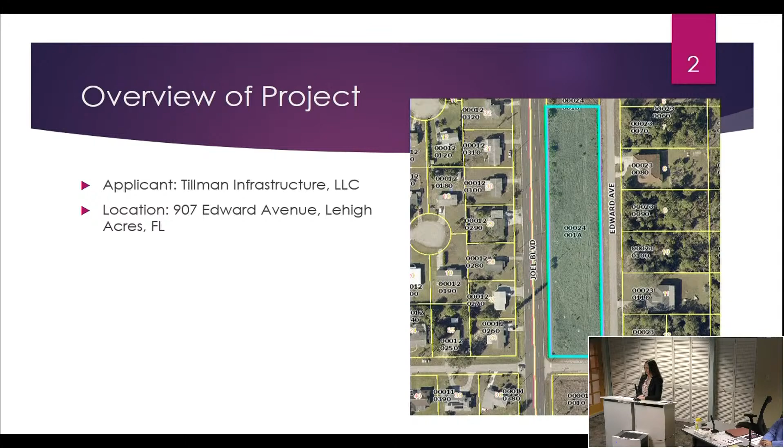We're here today for case numbers SEZ2022-00003 and VAR2022-00006 to request a special exception and variances to construct a 155-foot wireless communication facility. The property is located at 907 Edward Avenue in Lehigh Acres. The property is a narrow strip of land between Joel Boulevard and Edward Avenue, lying north of 9th Street. The actual parcel is a 75-foot by 75-foot leased area on the southernmost portion of the parent parcel, which you'll see right here in the center of the two streets. The property has a current zoning of C2, commercial, with a central urban future land use category and is presently vacant.

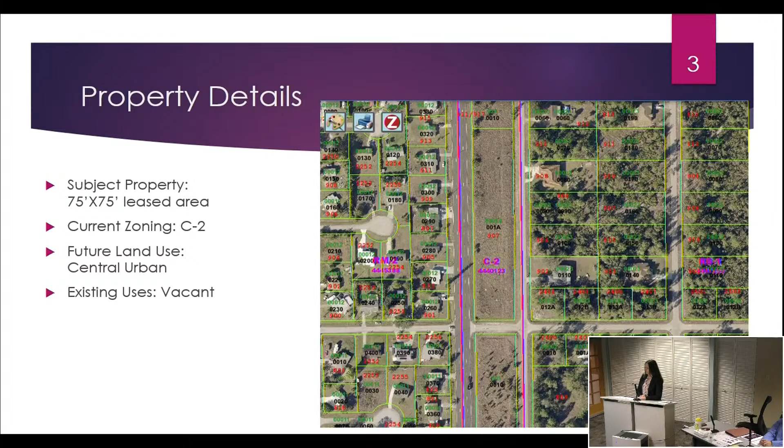The surrounding land uses are generally similar. All surrounding properties are located within the central urban future land use category, and the properties to the north and south are both zoned C2 and are either vacant or vacant with a paved right-of-way. The property to the east is zoned RS1 and has a paved right-of-way in between some vacant and residential property, and the property to the west is zoned RM2, similar situation, paved right-of-way and then residential uses.

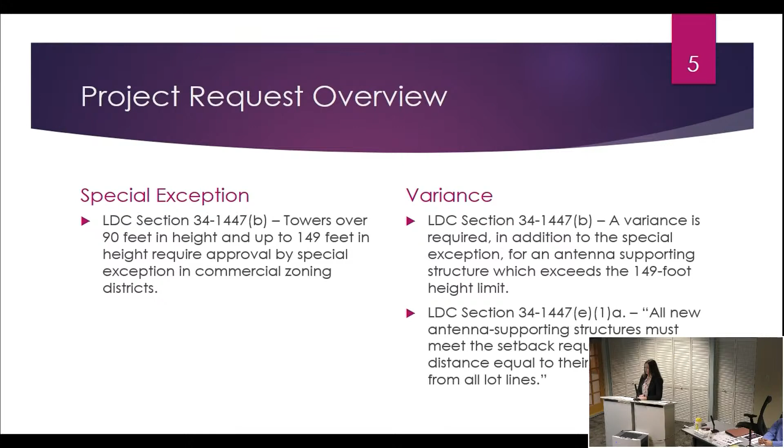So our request is twofold. The first request is for a special exception, required by LDC section 34-1447B, providing that a special exception is required for towers over 90 feet in height for commercially zoned areas. The second request is for several variances. The first variance is pursuant to LDC section 34-1447B, which provides that a variance is required in addition to a special exception for towers exceeding 149 feet. The second variance consists of a series of setback variances pursuant to LDC section 34-1447E1, which states that setbacks must be equal to the overall height of the tower, 155 feet in this case.

So just an overview of the specific request. The special exception is a request to allow the construction of the 155-foot tower pursuant to that prior code requirement. The variances are: number one, the height requirement, an additional 6 feet over what the code requires for a special exception. The eastern setback is a variance of 96 feet to allow for a 59-foot setback. The western setback is a variance of 96 feet to allow for a 59-foot setback as well.

Okay, going too fast again? Sorry about that. The eastern setback is a variance of 96 feet to allow for a 59-foot setback. The western setback is a variance of 96 feet to allow for a 59-foot setback as well. And the southern setback is a variance of 92 feet to allow for a 63-foot setback.

So we'll start with the special exception criteria found in LDC 34-145C3. Pursuant to this criteria, the applicant must prove, first, that the development is consistent with the goals, objectives, policies, and intent of the Lee Plan. Applicant believes this to be the case and will provide further analysis at the end of the presentation with regard to comprehensive plan consistency.

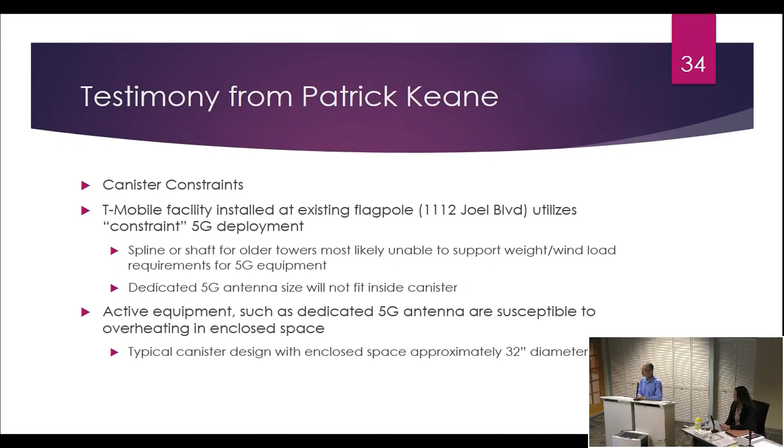So these are some of the concerns. Now, as a radio frequency engineer, I don't do structural analysis or sizing. I'm just making proposals, but I do look at results for structural analysis.

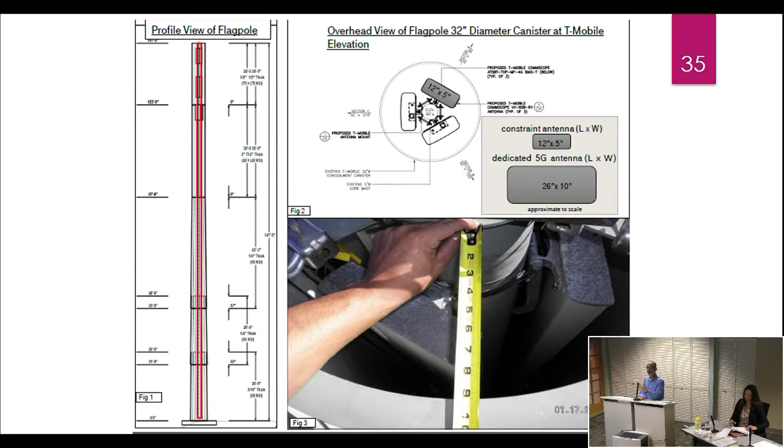So they're ruggedized, larger, heavier, but they provide a higher performance characteristic. When I say radio, there's antennas and there's the radio. The radio is just a box that sends and receives signals. If you have a Wi-Fi router in your house, that's a transceiver, it's the same thing, just bigger and more powerful on a tower. So that's the concerns from why we can't put that on, coming from my experience as a radio frequency engineer.

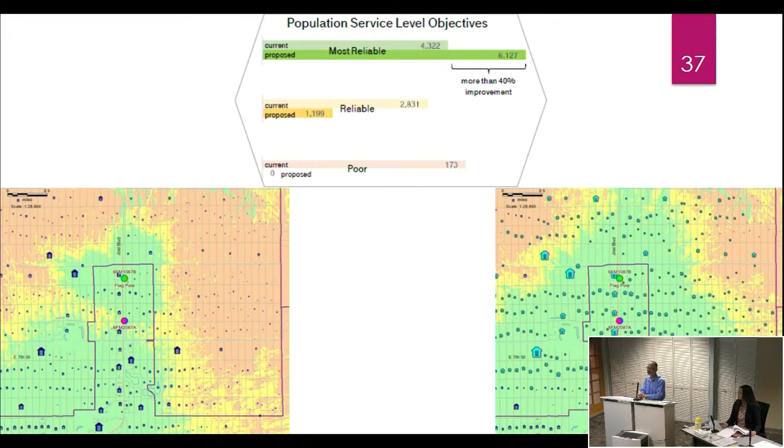Another thing we look at is 911 calls, emergency services. This area is typical, not a downtown, not out in the middle of nowhere, it's residential. Recently, over the course of 45 days, there were 140 911 calls that our network captured. If our customer can't make a phone call on the T-Mobile network, it's going to find Verizon, AT&T, or any other service provider. But in that 45 days we had 140 911 calls, and most of those were outside what's referred to as the most reliable area, not in the green area but in the yellow or orange. So we looked at those locations and said, if we put this new tower here, we're going to improve 40% of those locations as well.

The reason I'd like to put that up is because imagine a person on a call for 20 minutes in a 911 emergency. You don't want your phone to drop, right? So it's very important for us to maintain that continuity. The probability of maintaining that continuity is enhanced significantly by having the full suite of 5G services, because if one service level is inactive or can't be reached, other service levels can be added into the channel, so to speak, to support those emergency calls. Everybody knows how important cell phones are today, so we just want everything to work better, basically.

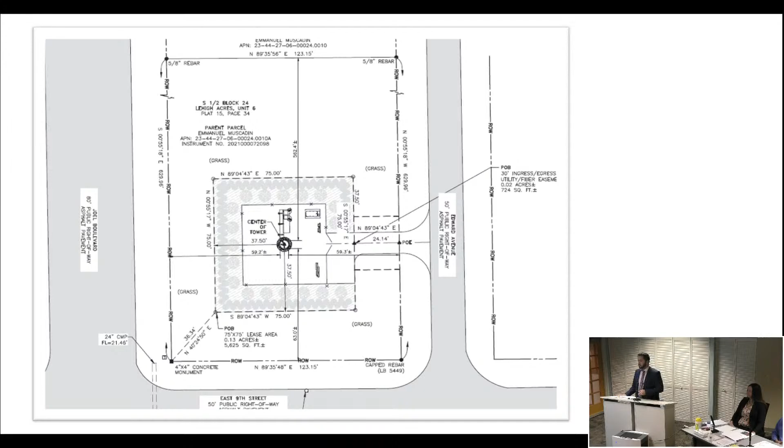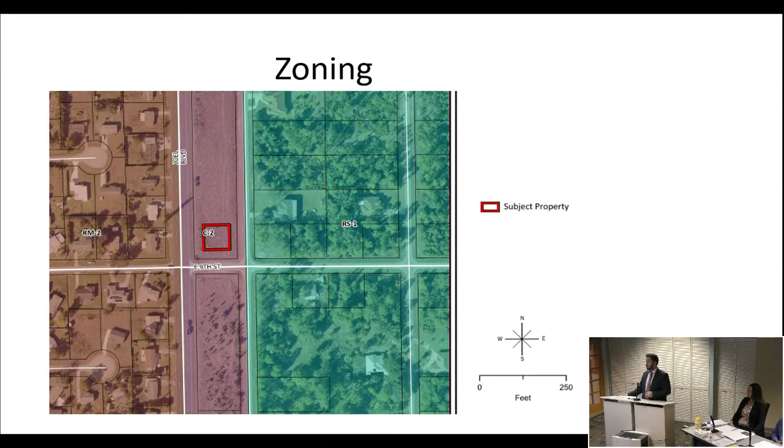The applicant's already gone through the propagation map explaining the benefits of the tower with this new construction standard, versus what's there today versus what they're proposing.

The applicant has gone through the special exception criteria, so we won't go through them at length, but this is a platted lot that's been cleared. There are no environmentally sensitive features on the property. They'll likely, during the development order process, have to ensure there are no burrowing owls or gopher tortoises on the property. And then there's the slew of zoning requirements in the land development code they'll have to comply with.

Like I said, the applicant's gone through this, so I don't necessarily want to go into too much detail. I do want to speak to at least the lease agreement. There is one attached to the staff report as well, just for your review.

So just to speak briefly on the variances again, staff does agree with the applicant and with the staff report as it's been prepared, that it does meet the criteria for variances, at least the first 5. There's a few of the additional criteria that staff doesn't believe meets, or not meets, but is not necessarily relevant to this case.

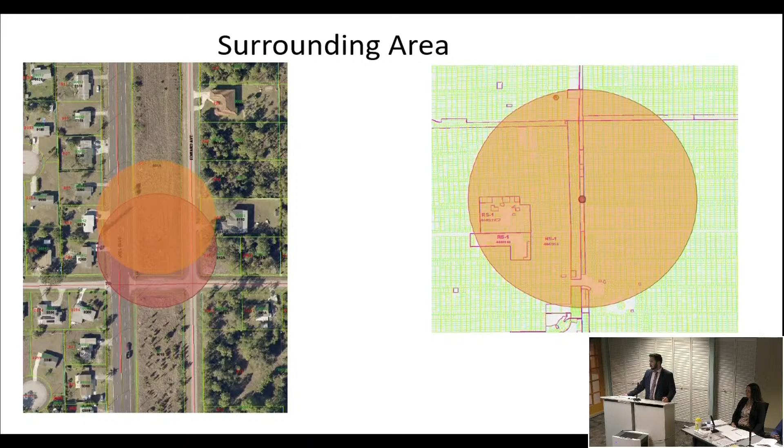I think the applicant's already stated that this is an interesting shaped property, and with the characteristic of having roads on 3 sides, there really is an inherent condition on this property that would make it challenging to place a tower on this, let alone other types of commercial uses. The footprint is really small on this property of what it would be, versus a typical single or double frontage lot.

With the placement of the tower, this does reduce the injury to the neighborhood in terms of visual impact. It would be inappropriate to say that a tower doesn't have a visual impact, but based on the needs of the way the world's going, we find that they're kind of a necessary thing to have.

And then the applicant did go through the lead plan analysis on this tower as well, and just going back to policy 5.1.5, the reduction of that visual impact by not sliding up the tower further along the block - we find that that also meets the intent of that policy as well.

So with that, staff does recommend approval with the conditions set out in the staff report, and we're here with any questions you may have.

I think that you addressed the questions that I had. Thank you. Did applicant have any questions of staff? No questions. Thank you. Thank you. Great, so with that, we will open up the public comment portion.

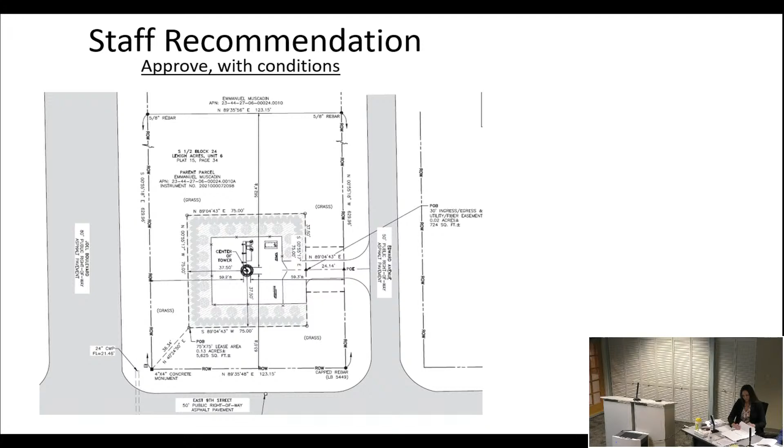Good afternoon. My name is Ryan Maloney. I represent SBA Towers 2 LLC, which is the company that owns the existing cell tower that's 0.56 miles away, located at 112 Joel Boulevard.

I did have a submission, not written opposition, I'd like to put into the record. This has been provided to the applicant and to staff as well. Okay, thank you. I'll accept that as Jimerson Exhibit 1.

And I have a PowerPoint as well. Do you want a written copy of it? If you have it, that would be... Thank you, and that'll be Jimerson Exhibit 2. Thank you very much.

So just to walk through, I think it's important to note that T-Mobile is a current tenant on SBA's tower. That was testified to by the applicant's witnesses. We understand that their plan is to move their equipment from SBA's tower to this new tower if it's approved. So we submit that we have standing to be here.

On this PowerPoint, we also did our own photo sims, from maybe a closer vantage point that may be more relevant to the people living in these homes. The one on the left is existing, the one on the right is the photo sim of what it would look like. As you can see, the entire top of it has the antenna on the outside of this tower. This is another one from a different, similar vantage point. And here's one other one.

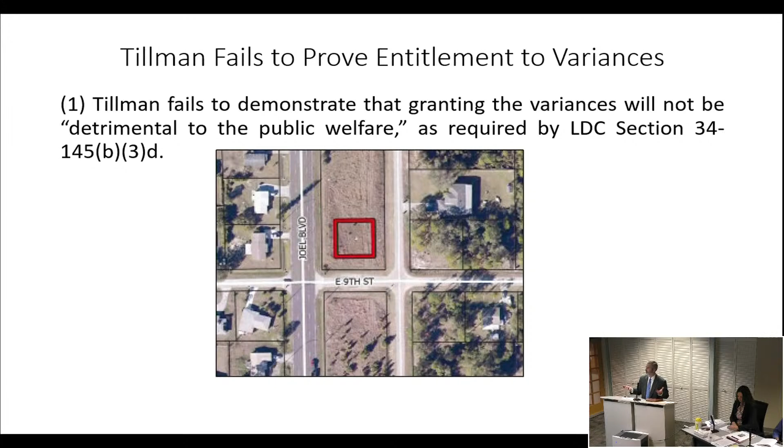We heard testimony about the tower collapse, and staff referenced the letter about the tower collapse. That letter is a signed and sealed engineering opinion from Robert Beacom, who's not here today, with Sabre Industries. His letter refers to a 160-foot monopole, but we know this is a 155-foot monopole. He also says that this letter only applies to the above referenced monopole, so what has been submitted in the record does not apply to the tower that's sought to be constructed.

Now we've heard testimony from Mr. Bergeron that he's looked at it, and that it's his opinion it would collapse within the structure within 75 feet. But I would ask you to ask him why this letter is not from him and why it's from Robert Beacom, why this letter references a 160-foot monopole versus a 155-foot monopole, and ask him when he did his analysis, and whether he has a signed and sealed engineering opinion to the effect of this one. As the record stands, the letter submitted doesn't qualify the tower that's at issue.

If this tower fell, we all know hurricanes are a serious potential issue here. This 155-foot tower, if it fell and did not collapse in on itself, and went further than 59 or 63 feet, it could fall on Joel Boulevard with cars traveling on it. That is potentially a safety issue, and we submit there ought to be a signed and sealed written engineering opinion to establish this fact, and there simply is not.

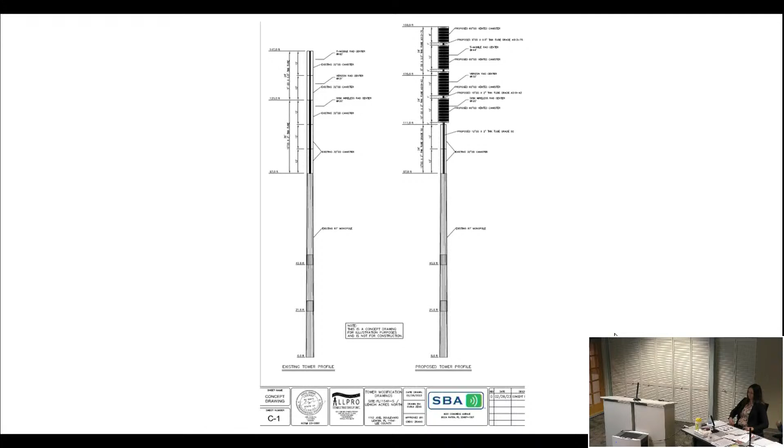Just want to hit a couple brief comments. There was a question asked whether or not the rehabilitation of this tower would require any action from our end. I was looking over the conditions for what I believe is a special exception approval - the names seem to line up, but it's SEZ2022-00003. It does provide extra conditions about the specific design of the tower and prohibition of exceeding 149 feet. So between those two things, we'd probably expect to see a special exception come in. I did want to note that this approval also has variance approval for reduced setbacks on this because it's a similarly dimensioned lot. I don't have that paper copy here, but we can provide it if that's of interest. It was SEZ 2008-00019. Thank you.

I did want to speak to a couple different things. Probably the most important one is he did bring up the FAA letter of no hazard to navigation. They did provide an analysis. I don't actually believe it was provided by the FAA, I believe the company was Tow Air, and staff believes the report sufficiently addresses that. But if you would like to leave the record open for them to provide that, I think there's merit to that as well. So we certainly are open to that happening.

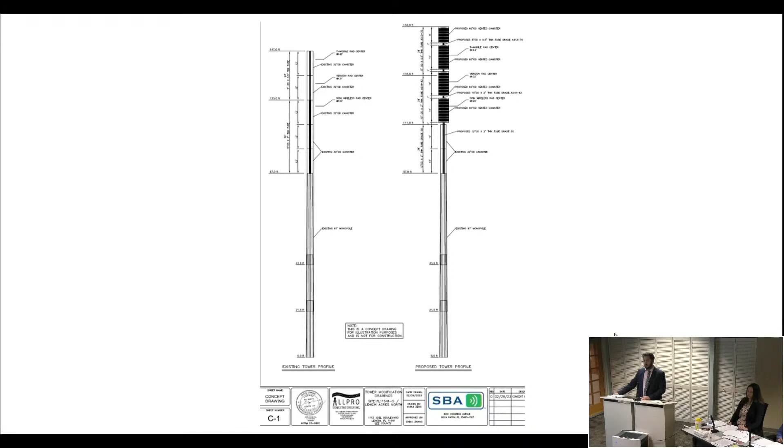On the proliferation point, to your knowledge, when the county application came in to staff, what you've reviewed, this alternative wasn't known to you before today. I don't know when this was made known to you, but that wasn't in your evaluation, because the finding you have to make is that it cannot be accommodated on an existing building or structure. Correct, or something like this. So you made that finding because this information was new. Correct, we would make that finding even now today, knowing there's no application active. We haven't had any pre-application. At the risk of sounding like this is a speculative design, we would expect it to be a little bit further ahead in this case.

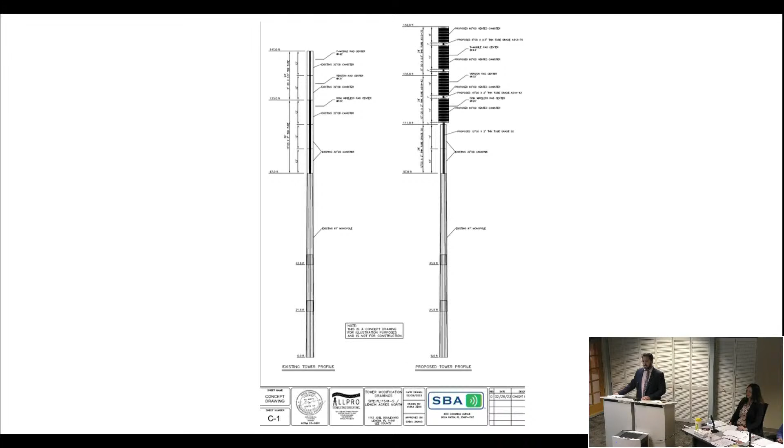Okay, thank you. Did the applicant have any questions of the staff? No questions, thank you. Were there any closing comments you would like to make before we complete the record?

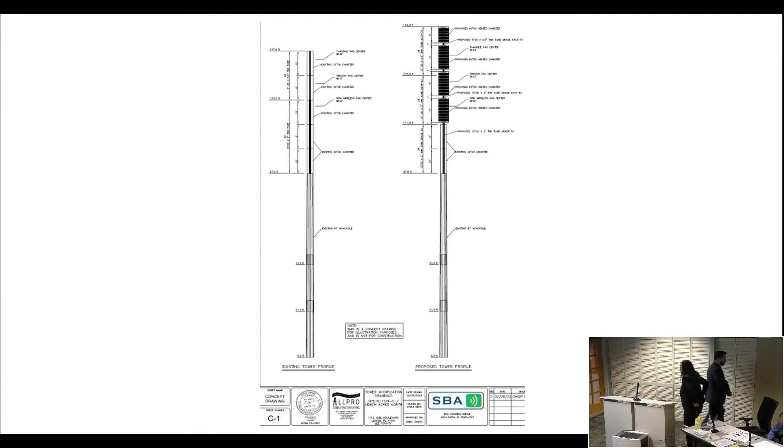I think I accidentally made my conclusion earlier, but just wanted to reiterate that we believe we've met all of these special exception and variance criteria, both the general and specific criteria. We do agree with staff's recommendation of approval and are amenable to all of the conditions, and if we can follow up with any additional information, we'd be happy to.